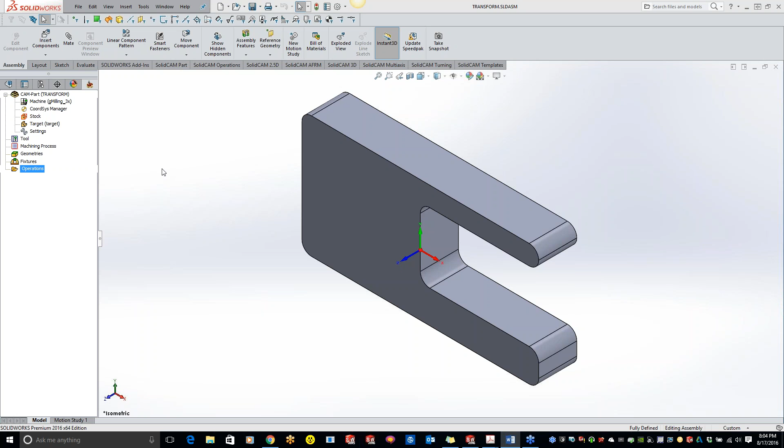We're transforming it using a mirror feature, quite different ways of doing it. So what I'm going to do for our first part is we're just going to program just one simple part right here, and then we're going to transform that part multiple times.

So what we'll do is create some stock, and we'll treat it as if you guys are running this on a router with a vacuum table or something, and you want to make multiple parts out of maybe a 2-foot by 4-foot piece of aluminum.

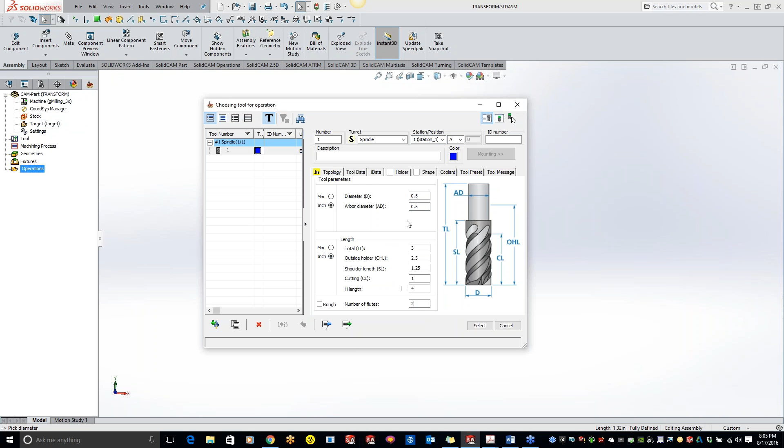First things first, we'll program it like we normally do. We'll come in here, do a profile, grab our geometry, accept that, grab a tool, and use a 1/2-inch cutter. We'll cut aluminum here, let's put a holder on there. And that looks good, so we got our tool and holder.

Do our depths real quick, and let's just do a helical, doing a helix down into the part, going down to 100th thou.

Okay, so now we've got our tool path for just our one part right here. We can play this through, but let's pretend we're cutting this out of a very large piece of stock. So I'm going to add that stock in here. I went through the stock in one of the other night classes, but we'll just add a new part.

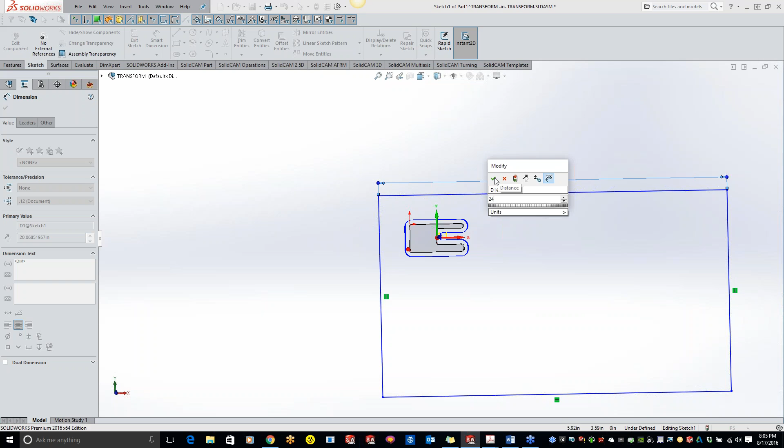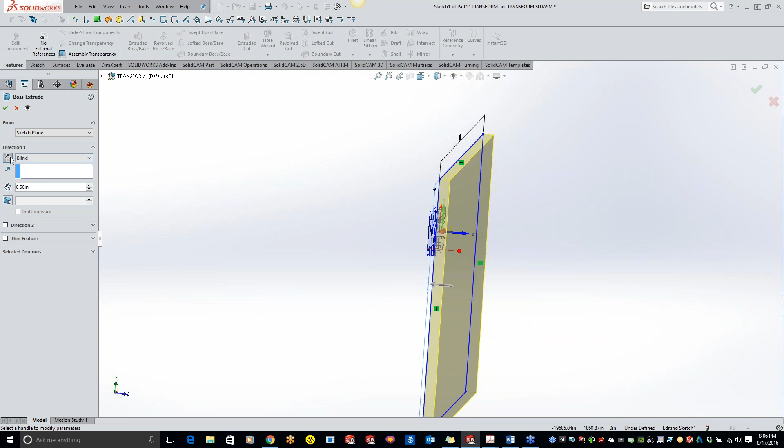Let's see, we'll say this is 24, and we'll do maybe 1 foot, and we'll extrude that out real quick. I just want to make sure I'm going the right way here. Looks like I need to reverse my direction. There we go, hit the green check mark.

Now I'm going to add that to my stock here. This has nothing to do with transformation, I'm just adding in stock for you guys. All right, so we've got our stock here.

Now, let me change the transparency so we can see our part. Instead of taking that part—maybe we want to get 10 different parts out of this big chunk of aluminum—instead of clicking and moving it around to add more parts, we'll just use the transform feature.

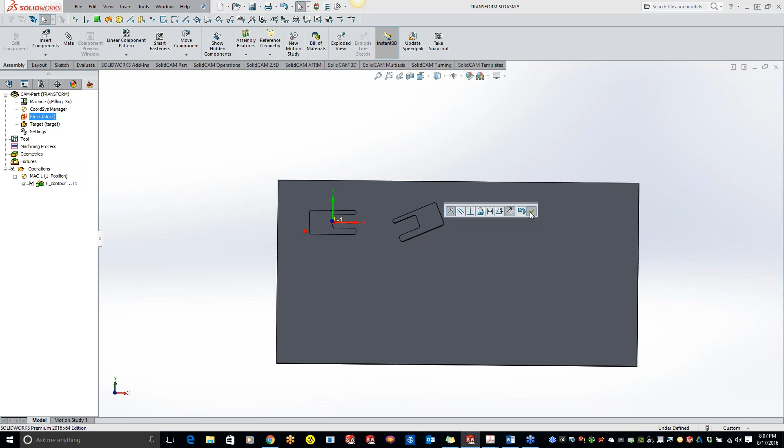Oops, let me accept that. So right-click once you've created your operation and click on Transform. You have all your transforms right here, and I'll go through each different option. But for this one, we're just going to use Translate right now. Now you have the option to do a matrix or a list. I prefer matrix, just so it's a little easier to see.

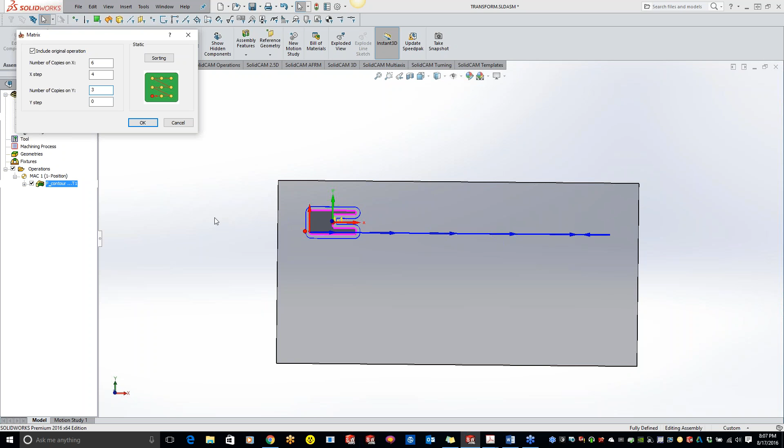I'll show you list—basically you just tell it what you want for an offset in X, Y, and Z, and enter it in there. Or with the matrix, you can tell it how many copies in X and how many in Y. So let's say we want maybe 6 copies, spacing out about 4—let's try 4, and go 3 copies. I'm just kind of shooting from the hip here, guys. Let's see, what's our dimension right here? Let's go 2 inches. And you can put a minus direction, so we'll put it in there.

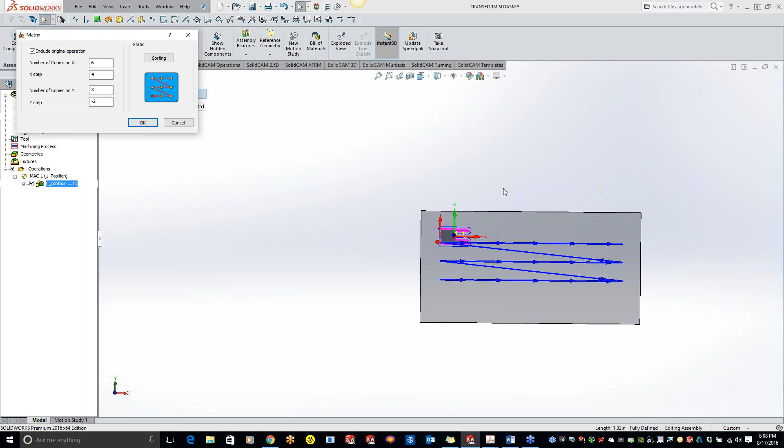So once I hit OK, basically what I told it to do is create 6 copies going in the X direction with a spacing of 4 inches, from part to part. It's not the distance between the parts—it's from a point on one part to the point on the other part is where it will end up.

So hit OK there, and you'll see that we get our parts. Now I can see that I went too much in the X, and I need to increase my spacing in the Y. So let me just edit that real quick here.

And we'll just go 5, and maybe we'll do 3 inches of spacing. Now you'll see that we spaced it out. So basically, the transformation is saving you guys a lot of time on the programming side of things—all I had to really do is program that part one time. But now when I go to simulate this, let's do it in Solid Verify here for you guys.

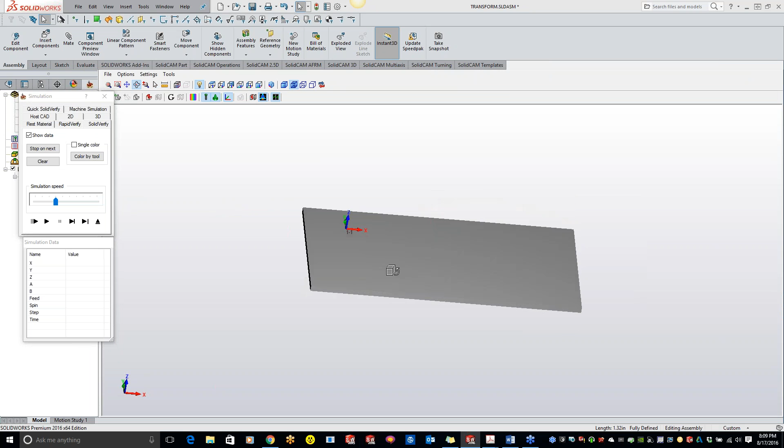You'll see that we have all our parts. It's somewhat like nesting, so you guys can put as many parts as you want on there, but it's not going to automatically figure out the best order or shape. So you guys just have to tell it where you want it, with that spacing. We basically programmed just one part, but now we have all these parts done and finished without having to program that part multiple times, or copy and paste it multiple times. We just have one simple operation right here.

So do we have any questions so far just on doing a simple transform? Let's see, so we are going to...

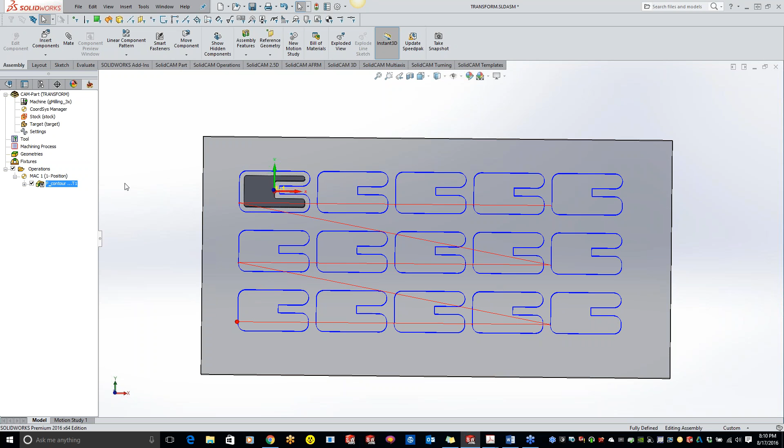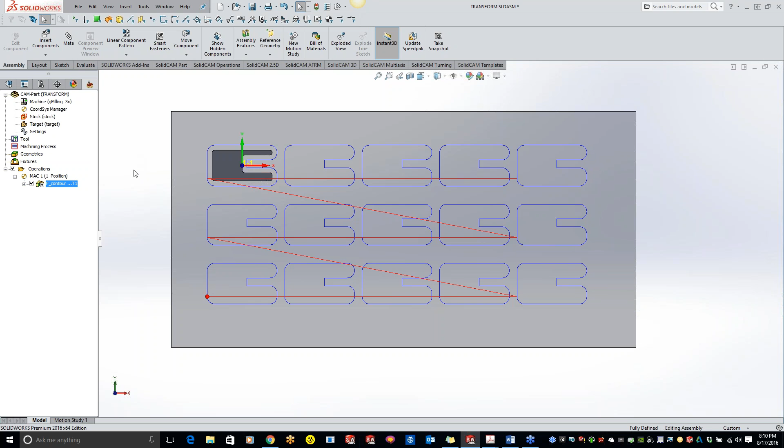Yeah, Jeffrey, we're coming over to your house and we're having a dinner party. Or maybe we should have it at Terry's. Terry should have it at your place. Yeah, sorry, that sounds good. I'll make a pan roast and have everybody come over and have some seafood, if everybody can get through all the fires over in California right now. Yeah, if anyone does want a phenomenal seafood recipe, it's sort of like a very rich man's chowder, send me an email and I'll email you the recipe. It is absolutely unbelievable. Cooking 101 here. Sorry about that, Kevin. No problem.

Okay, so this also works, guys, if you have multiple vises. There's two different options for running multiple vises, let me delete what we've done here, and delete our stock out. So let's pretend we're taking this part, and put another one right here and another one right here. Maybe you have a vise set up, or even bar stock, with different vises. If you know the distance of the vise, you can use this transform feature. So unfortunately I'll have to add another, let's do the operation real quick here.

Kevin, there was a question as well. Dwayne Cole asked, can I resume from the 5th part? Resume from the 5th part. Dwayne, can you give me a little explanation on what you mean by that?

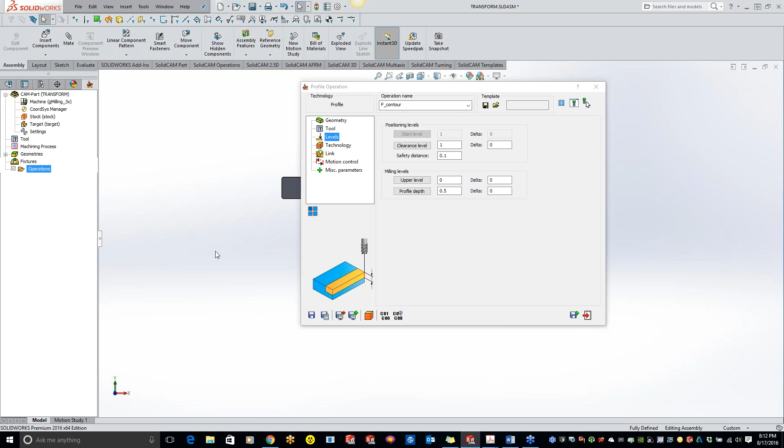If something happens, oh no, there is no way just to start the program at a particular location of the part. So either you have to go through your G-code and start it off at that part, or you can just run through everything. But unfortunately, there is no way to just start it at part number 6 and go from part number 6 on. We could program it so it's just at part 6 that way, but then you'd have to reprogram it. Can you type your question into the question box, because we don't have a way to unmute. Right, Kevin? Yep, go ahead and type your question in there. Like I said at the beginning, we put everybody on mute to eliminate background noise.

Okay, so we got our part there, we got our toolpath, but maybe you know that your vise is exactly 5 inches over, and that part is exactly 5 inches over. You can do the transformation there. Now, one thing I forgot to tell you guys is, instead of coming in here, closing out, and then right-clicking to do a transform, you can actually do it within the operation. Right here is the transform button, so you can just click transform. It'll do a matrix, and we know that we have 2 copies, and each copy is 6 inches away from each other. Hit OK.

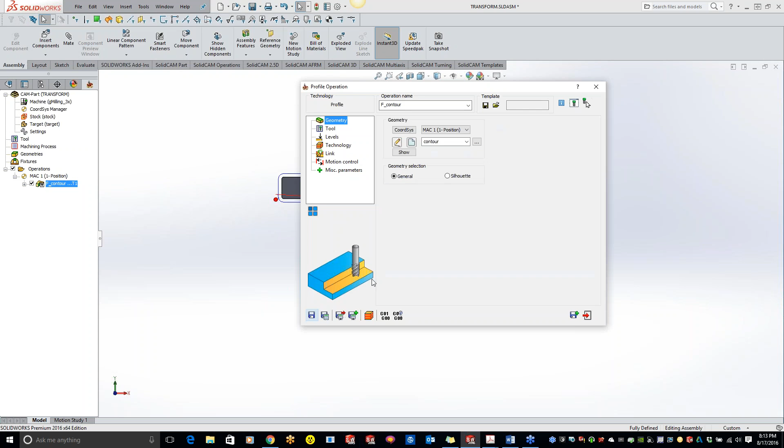And I only got 2 copies. Oops, sorry, let me change that transformation to 3 here. So if you know your exact distance, this is another way of doing it.

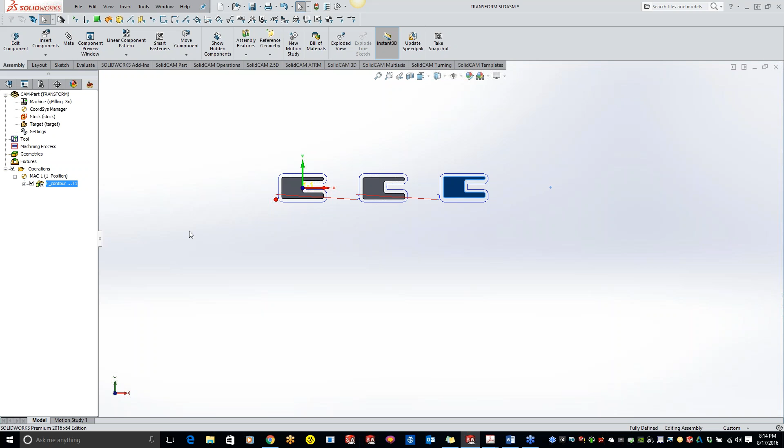For those of you that don't know, if you wanted a separate work offset for each part, right now these are all going to be under G54. But if you wanted a separate work offset for each part, we're getting off the transformation topic right here, but what you can do is double click where it says CAM part, come down to your machine options, and change the number of fixtures. By changing the number of fixtures to 3, it's saying we'll program this part for 3 different fixtures right here, and it will create G-code for 3 different work offsets. So this one will be G54, G55, and G56, but we only had to program the 1 part by itself. So that's another way of doing it.

So if I hit OK here, and let's just do our transform, delete that.

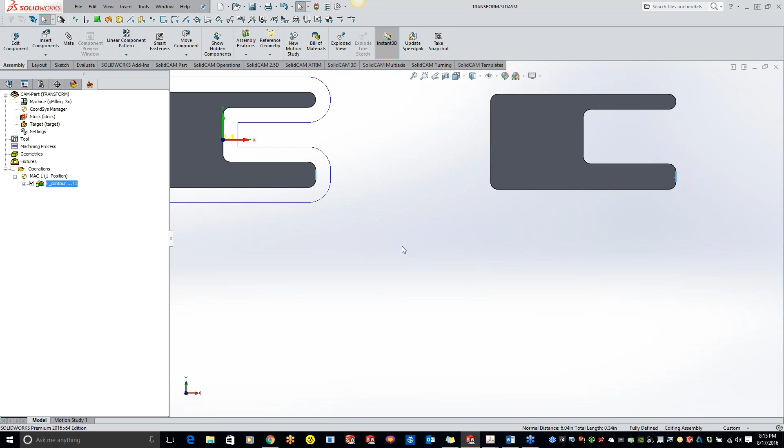What is the reference point between instances? The reference point is the distance between part to part. So it's going to be the reference point from right here to the distance to right here. It's just the distance from the part over, not the distance between the parts. It's just what you want to measure from right there to right here. We get a measurement of 6.04 inches, and that's what you could put in there to be exact. It can be anywhere on the part, as long as it's the same spot. So we can go from the backside here to the backside right there, and that's going to give you your distance also.

Now that we have that fixture offset numbering turned on, we only programmed the one part here. Let me open up the operation and we'll G-code it out. You'll see that we have G54 right here. If I go farther down, we have G55, basically doing the exact same programming. And then farther down is our G56. So if you guys are using multiple fixtures running the same part, this works wonderfully. A couple different ways of doing it for you guys.

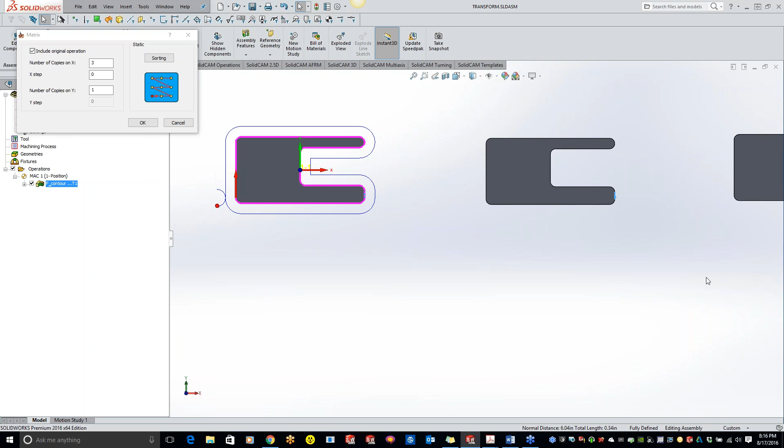He's asking where we can change that distance. So what we'll do is another transform, do a matrix, and do our 3 copies. Here is your distance that you're changing. So we measured, what was it, from there to right here, 6.04. So we can put 6.04 in there. Hit OK, hit OK. And you'll see that we got our distance matched up just perfect there. That's how you can change the distance between the two.

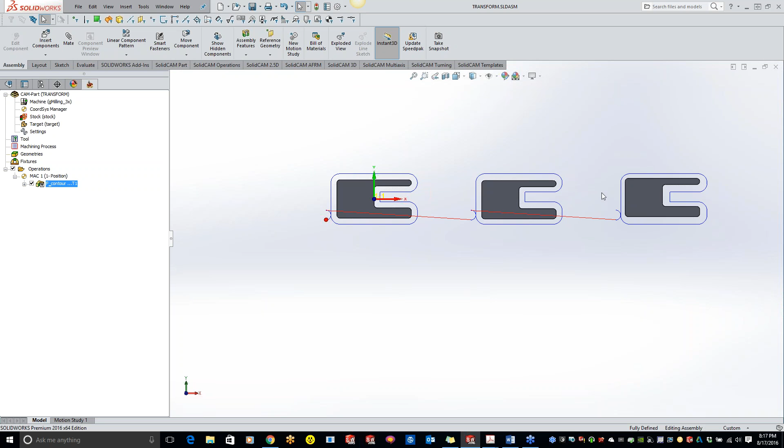Let's get into a little bit more complex parts here. Open up one of my other projects that we're working on, and we'll work on the translate and the rotate feature. This part has the same pattern going in the X, but it's also rotated up every 90 degrees. So we'll start off with doing a basic profile here again, and we'll just program just the one slot, and we'll do the auto constant Z.

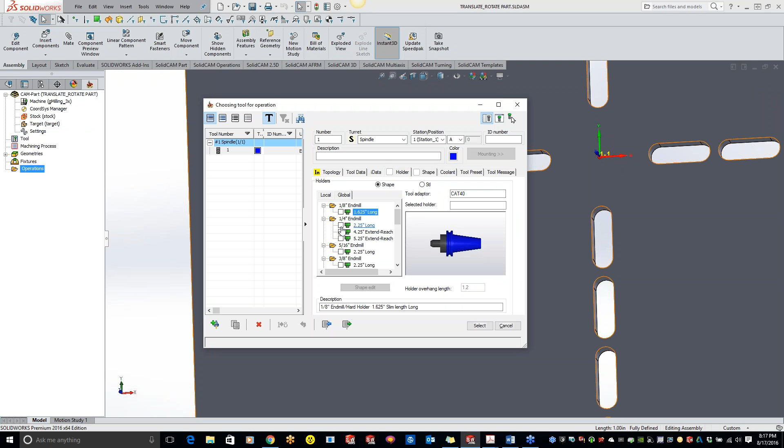We'll do a nice helical entry going with a 1/4 inch tool, just 100 thou. I'm just going to turn my lead in and lead out to none. So we have our part there, and we just programmed just the one by itself.

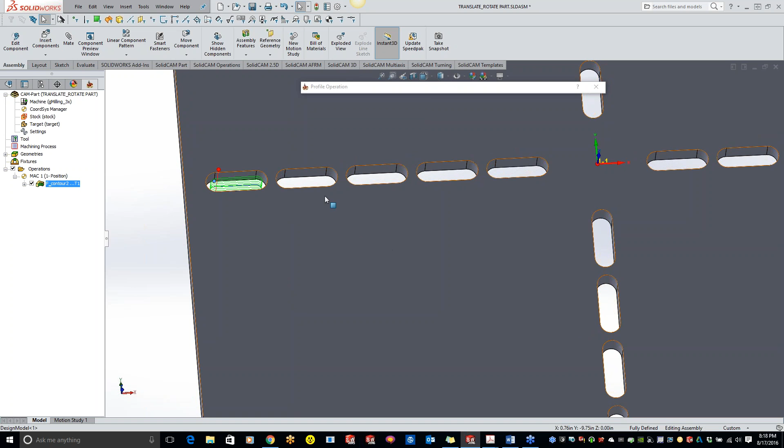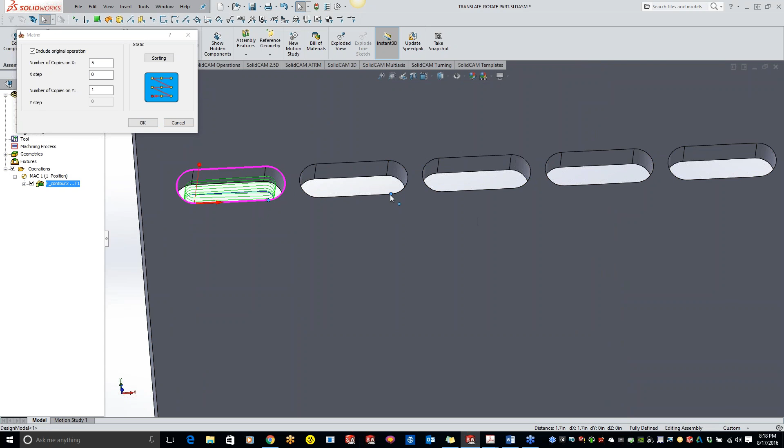So what we want to do now is obviously copy that over. We'll bring it back up, click the transform, and do the translate. Do a matrix again, and we have 1, 2, 3, 4, 5, so we'll do 5 copies, and our distance is going to be from here to here, which is 1.7. Hit OK.

So now we did the transform, we have our slots going in the X direction. Now what we want to do is rotate it up. So go back to our transform, and you can add as many transformations as you want here. You don't have to feel that you have to stuff it all in one, just keep adding to the list. So now what we're going to do is a rotate.

We have the same different options, you can do a delta or a list. I kind of prefer the list. What we'll do is include the original. Our angle value is going to be every 90 degrees, and I have 3 different angles in there, so I'll just add 3 and hit add. Now you'll see it does it for 0, 90, 180, and 270. So we can hit OK.

And now you'll see that it did all of our parts. So what we did is we did a translating it all the way over, and then we did the rotate feature, which is rotating it around.

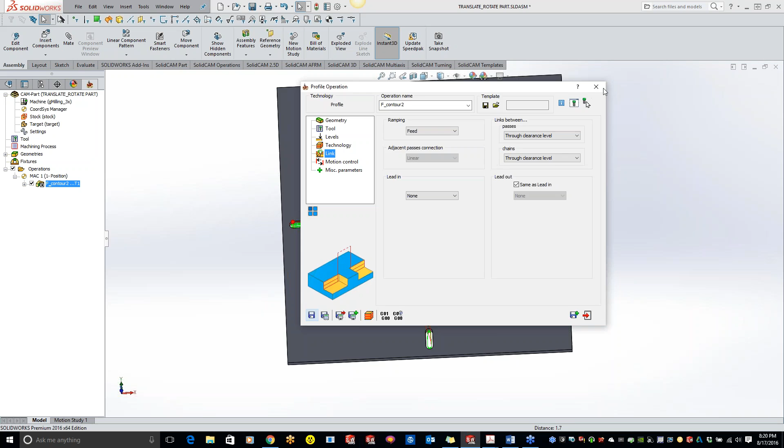Now, if you guys want to add more of those in there, all you have to do is increase your number right here, and we can keep adding more. So like I said, we basically just programmed the one slot, and then we transformed everything from there. There's really no need for you guys, if you have something similar, to program that multiple different times and have multiple different operations. We can do this all in one operation, but you'd have to go through and chain each one of these, or we could just use the transform function in there.

All right, so let's take another look in here. So what you guys can do also is, let me just cancel and clear everything in here. So we're starting off fresh, and now we have no more transformation in there.

Now what you guys can do is, instead of editing the current operation, you can add a new operation. You can add it at the current position in the operation tree, or you can add it at the end of the tree. So if you want, we can just say add a new operation, and then we'll do the translate in the matrix.

And what did I say? 1, 2, 3, 4, 5. We did 5 at 1.7. Hit OK, and we did the rotate list.

Actually, we won't include the original that time because we already did the original. So now what we'll do is just do an angle value of 90, 3 times, add, and now you'll see it adds a separate operation with just the transform down here.

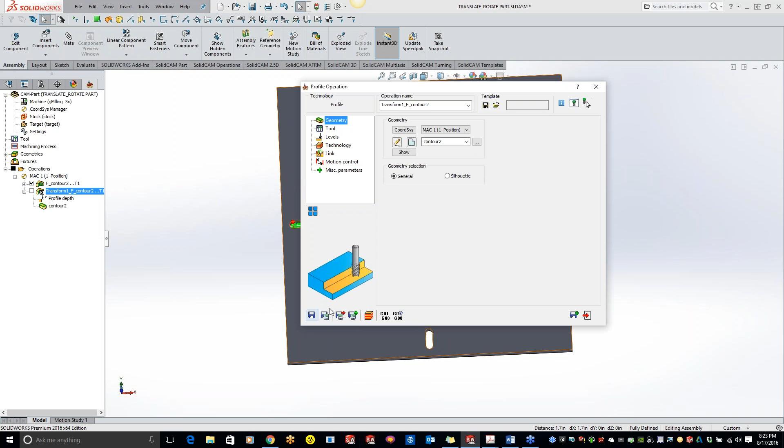There we go. So now you'll see it kept our original down here of just having the one, and then it started a completely new operation with the transform in there. So hopefully that makes it pretty clear for you guys on what you want there.

Also inside there, you guys can suppress the original too. So just some more features in there. And you can do the synchronization, basically just update everything. So do we have any questions?

The include original option is a little vague as well. Okay, so let me see if I can find a good way to explain this. Let me start over here.

Okay, so when we do a transform right now, if we do a translate in the matrix, if I just do number of copies as 5 and not include the original, and we did 1.7, it's going to leave out that original one that we pulled in there. So by leaving that one out, it kind of suppresses the original and then does the other transforms in there. That's basically what happens when you leave out the original model.

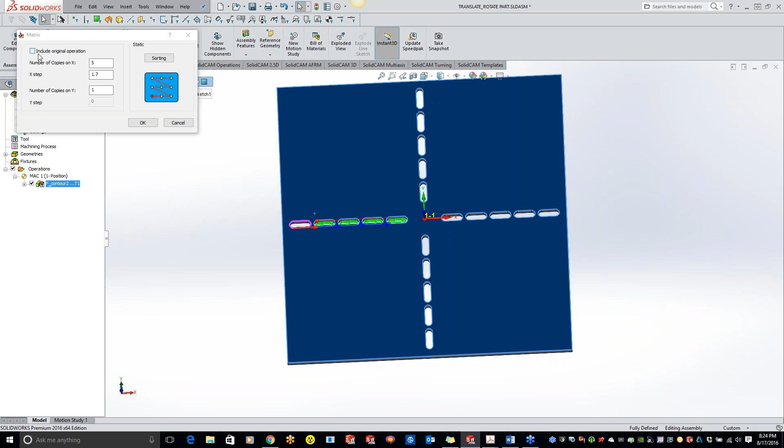Does that kind of answer your question, Dwayne? Okay, perfect. Yep, all right.

Any other questions that we have going on with the translate or the rotate functionality in there? Number of copies on Y, also when I use that. Okay, number of copies on Y is basically going to be the same thing. So if we had that,

let's just get back in here. We'll include the original. Number of copies on Y is in the Y direction. So right now we just have that going in the X direction, but if we want, we can create that many copies in Y too. So maybe you want to do a second set, but you just didn't have the CAD updated for it. Let me just get a quick number here.

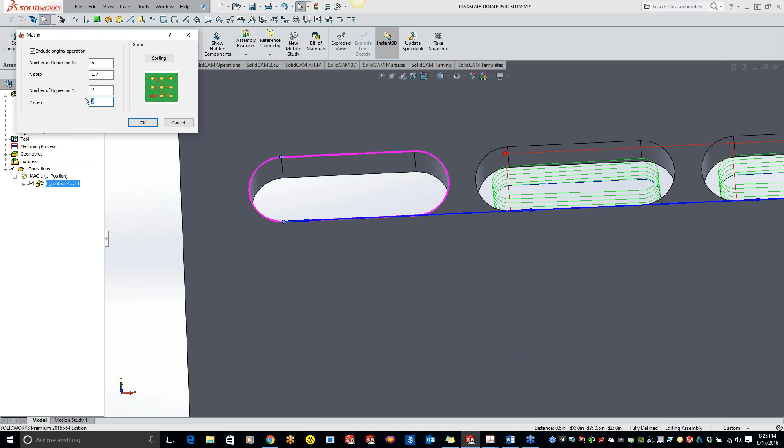Let's see, the distance of that slot is 1/2 inch, so let's just go 1 inch. Hit OK. So the number of copies in Y is basically going to just copy it up in Y. Let's see, I'm falling behind here. Copies in Y. Yeah, the other one is after making Y equal 12 inches.

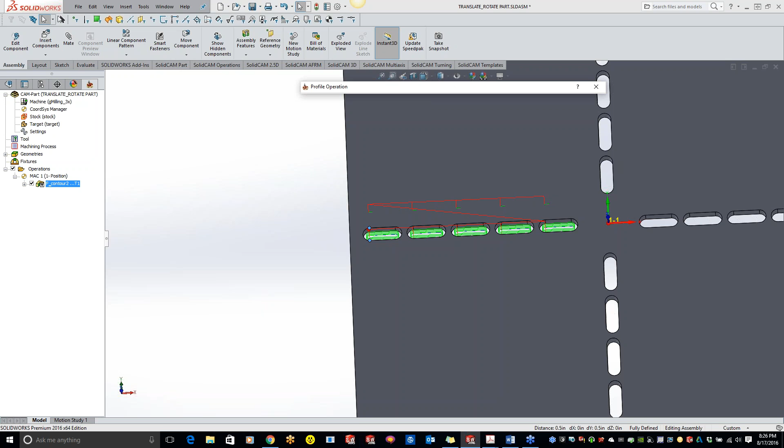Terry, you know what he's saying there? Yeah, he's saying he's in the Y. Let's see, when he goes in the Y direction, it always goes back to 1, is he saying? After making Y 12 inches in order to meet it.

It looks like he's got to change it to 2 and go back to 1. Okay, you shouldn't have to change anything. If you guys don't want to do any copies in the Y direction, just put it at 1, and you'll see it actually grays out the Y step. And you guys can put 24 copies in here, and it's going to space it out 1 inch apart. So we can kind of cover up the screen a little bit. Oh, I could even do 11.

There's another, say, I want 1 Y at 12 inches. So he wants 1 Y. And I think the answer why it's grayed out is because he's not going in the Y direction, so it grays you out, you don't have an option. Yeah, so no, the number of copies. So this one is counting 1.

Now, if you want another set of these at 12 inches above, which I think you're getting at now, what you want to do is you need to do a copy of 2, and then you can put your 12 inches there. So it's how many copies do you want? So we have the copies down here, and then we have the copies up here. So you have 2 copies.

The reason you guys can't change the Y step when it's at 1 is just because it's the original, and there's nothing to put its spacing in there. It's just keeping the original there. So yeah, you can't go Y 12 inches from Y when there's no copy. So there is no copy. Yep, put that at 2, and then you can put your 12 inches in there. So hopefully that answers your question, Dwayne.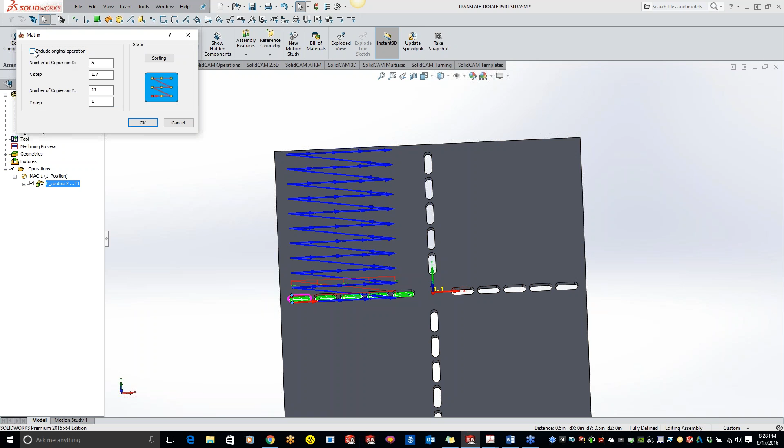And that's what he asked. Must I have it checked if it's unchecked? If it's unchecked, then it's just not going to machine that original one down here. But Dwayne, if you want, we can get into this more too offline, so we can answer questions. I think I have it answered, but if not, definitely let me know.

So now what I've done is kind of like what Dwayne was getting at, well this is a little bit past it, but we're doing 11 copies and only 1 inch gapping, and you'll see it's doing a zigzag pattern. But maybe you want to change the pattern, so you guys can come over here and change the sorting to something like that.

So it's going to kind of go up, down, doing a zigzag that way. You guys can change the sorting pattern however you want to best utilize the toolpath and get the fastest cycle time, so you're not wasting time going back and forth with a zigzag pattern like this one. So we're starting right here, and instead of going all the way back over to the left side, we can just go up and do that way too. So that pattern is going to basically be this one right here.

So now we're kind of utilizing our toolpath movement, starting at the left, going to the right, go up, and then go back to the left side, go up, go back to the right side, working that way. So Dwayne had another question. The biggest deal for me was the climb and conventional. Probably can't change that, but it would be a great feature.

Actually, it does change, and I'll go over that with the mirror, because mirroring is basically taking that part and flipping it over. So the toolpath will actually be flipped over too, and technically would be conventional cutting versus climb cutting, but it does adapt for it.

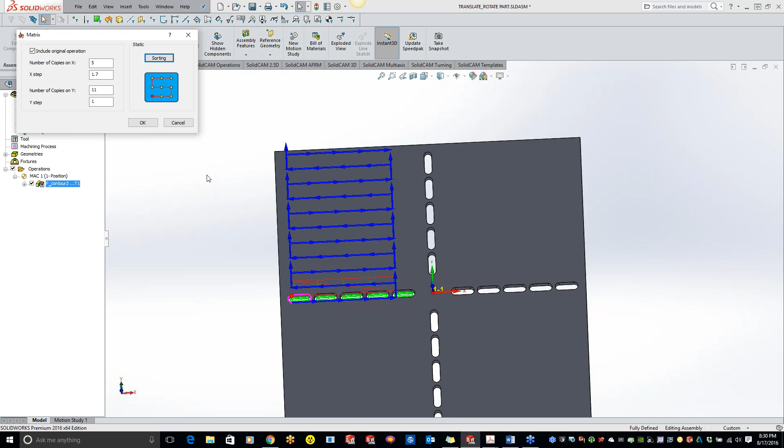For those of you guys that use the transform with the mirror feature in iMachining, it was only going the one way, so when you do the mirror, it would actually conventional cut. They added that in with 2016, so if you guys are looking for 2016, please let me know, just shoot me an email, and we'll get you guys set up with 2016.

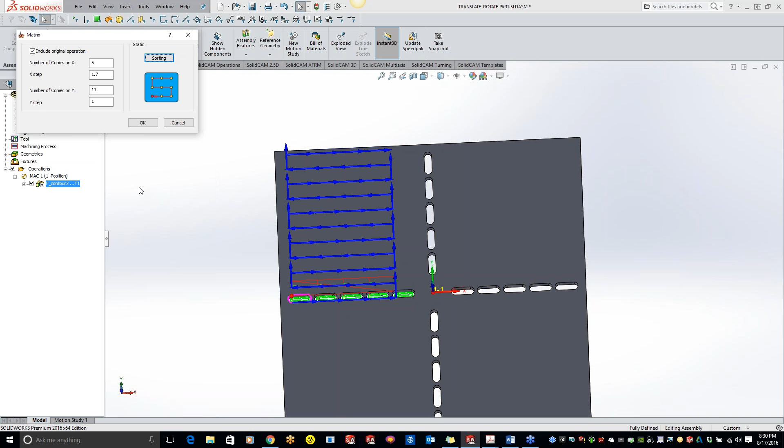We're just kind of doing a soft release right now, running on Service Pack 1, and it's been very good for us. So let's get rid of this part here and get into the mirroring. Or did we have any more questions on just that part by itself? I think we're set. Okay, perfect. So let's go to the mirror here.

Okay, pretty simple, easy part here. Basically we have a kidney shape over here, and it's an exact mirror of what we have over here. I'm doing some simple shapes right now because I know a lot of you guys have big parts, but I can't use those to show the whole world what we're doing.

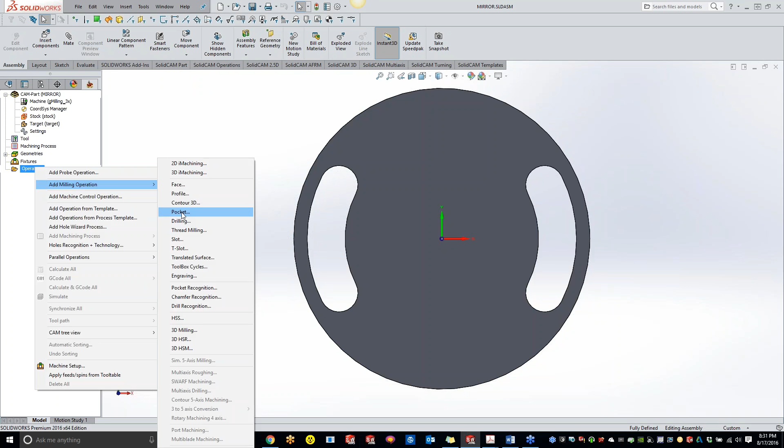So we just got a pretty simple part here. Let's go ahead and do a pocket operation here. We'll grab that cutter right there, set our level here, and take it to one full depth of cut. Save and calculate. Okay.

Okay, whose question do we got here? When dealing with multiple vices, can we mention which one to do first and which one to do second, sorting like a path? Yes, that's right in that sorting functionality I just showed. If you want to start from the left to go to the right, or go from right to left, it's right in that sorting tab in the transform feature. So to answer that question, yes, you can.

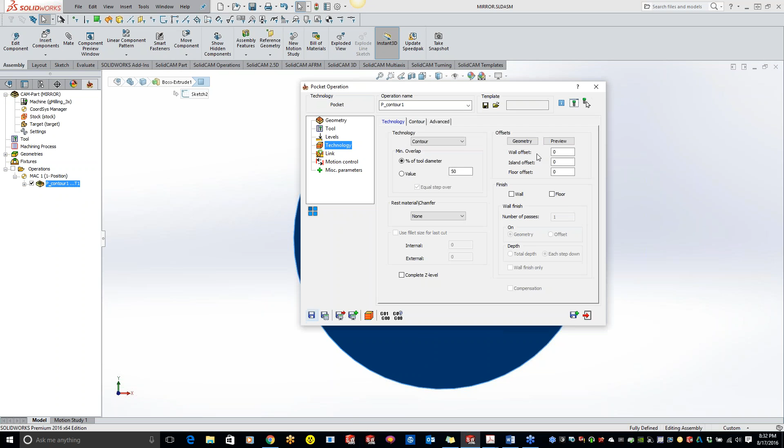Okay, so just program the one side by itself. Let's do a simulate here. Oops, I got my 3D mouse set up a little fast. Okay, so we got our shape cut out there.

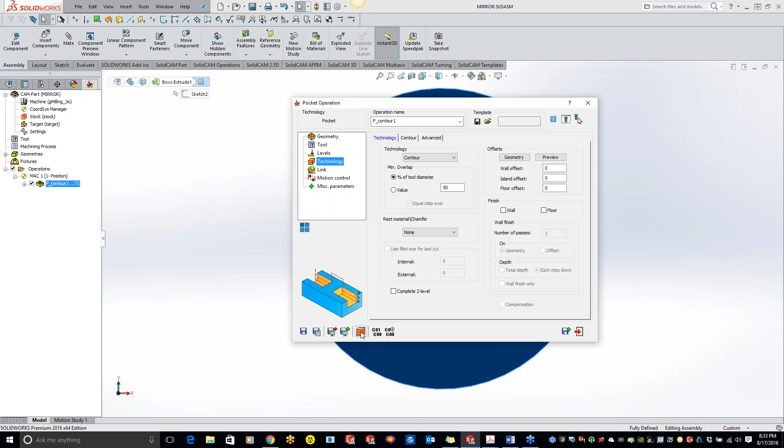So now instead of making a copy or adding more geometry, we can also do the transform feature, but now we'll do a mirror. I want to mirror it over my X and Y. You guys can pick your mirror point. So what I'm going to do is grab the center of the part, do a pick, center of part, and hit OK.

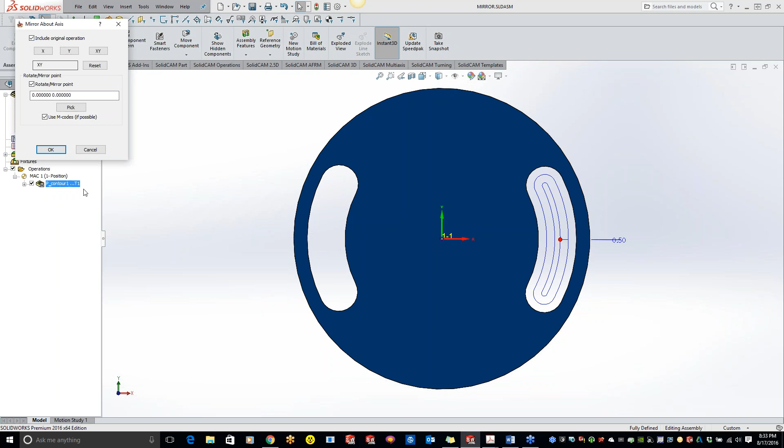Save and calculate. And you'll see that I forgot to include my original. So let me get back into my transform here and include that original.

Okay, so now we basically just copy that over. Now, I forgot to mention, if you're unsure what was transformed and what's not, there'll always be a little logo at the bottom of your contour profile operation. So right now we're doing the mirror, so the little M is in there. If we're doing a transform, the little T will be in there. Fourth axis, which we'll get to next, will show different icons for everything there.

So now let's do a simulate and show you guys that it will still be climb cutting. And see, we're still climb cutting. So everything works great with that.

Like I said, all you guys have to do is mirror it around. Pick the point you want to mirror about and mirror it over that way. From there, if you wanted, you can add a translate in there, maybe if you want to make a copy of that, making it a little bit closer in or whatnot, the sky's the limit. I'm just trying to show you guys on a simple part here, and then you can apply it on your end.

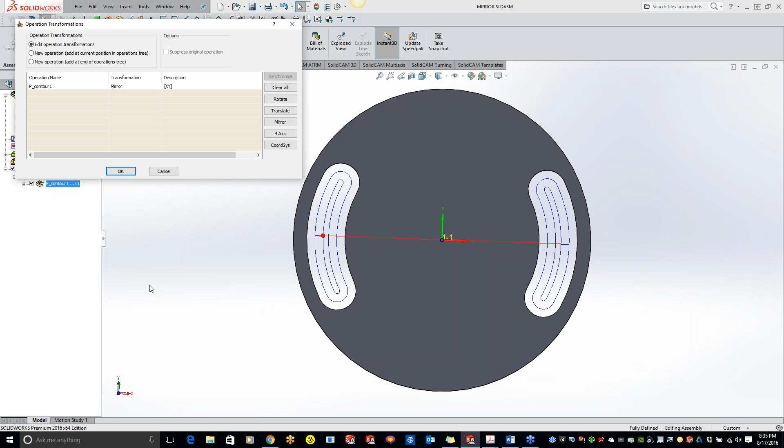Okay, so any questions on the mirroring so far? Looks like we're good, I don't see any there. Yeah, I think we're good, Kevin. I don't see any. All right, perfect.

So now let's get into fourth axis. So let's go to... there's a question: can we mention any plane?

Not sure what you mean by any plane. To mirror? Well, let's just bring that part back up here. Like a plane to mirror about, or like in SolidWorks? Like in SolidWorks. Yeah, so what we're doing here is pretty close to what we're doing in SolidWorks.

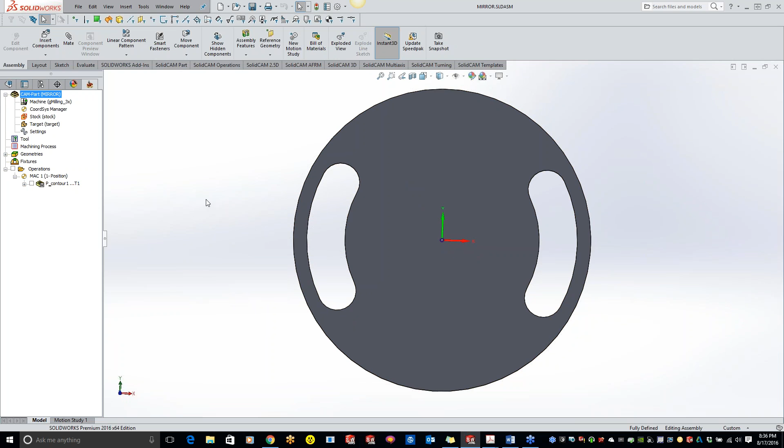In SolidWorks, you have to pick if you want to mirror about the x-axis or y-axis, and that's right here. But right here, you can see I did the x and y, but if you just want to mirror about the x-axis or just the y-axis, this is where you're choosing which plane you're mirroring about. And then, like I said, the center point of where you want it to mirror about.

All right, so let's get into fourth axis here.

And fourth axis. I already set up this part with some stock so we didn't have to waste time bringing that stock in here. Basically what we're going to do is have this part in a fourth axis indexer and just do some engraving and machining off.

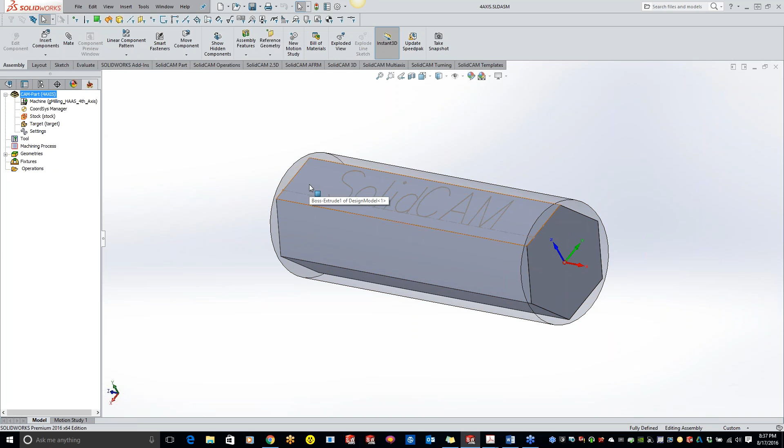So what we're doing, couple questions Kevin. All right, tell me what we got. Yeah, the first question was, this was for 3-axis, what you were showing them, right?

Yep. And then 5-axis will include XZ, YZ, etc. Correct, Dwayne. Yep. So that's going to be if you add a 5-axis operation and then do a transform off of that, it'll add that all in there.

And James had a question about the circular pattern on a transformation with numerous holes at a certain diameter. James, can you give me a little more information on what you mean by that one?

A circular pattern, the transformation. Not sure, it shouldn't matter. It shouldn't. Is he asking about different size holes? It shouldn't matter what it's mirroring. It's mirroring. Yeah, right Kevin?

Yeah, I think he's talking translates right here, but let me open up that part here. And let's do a transform. Oh no, let's just close that one.

So James, can you give us just a little bit more explanation of what you're saying there?

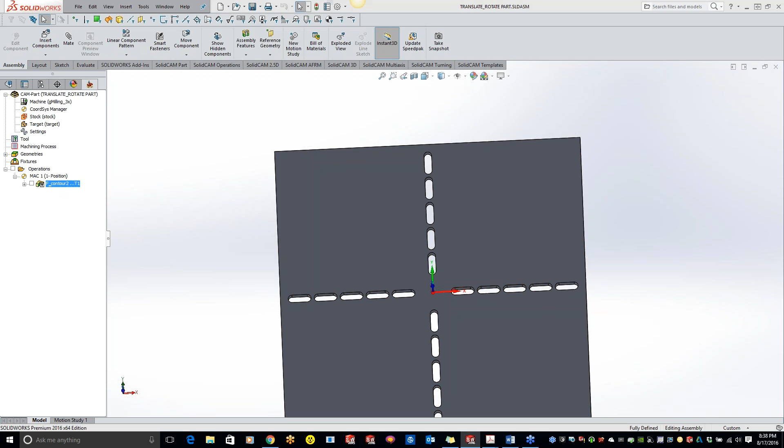If we want to do more circles in here, what we can do is do a transform. And I forgot where we even left off with this transform. I've got to see this.

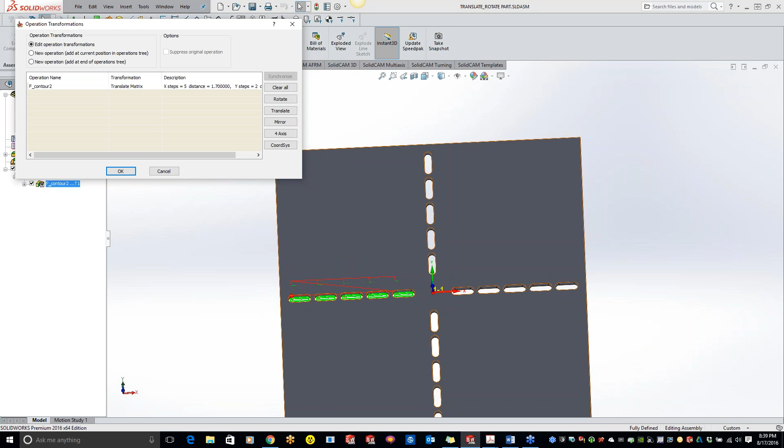Okay, so James had some more. He says, where you program one hole and then go to a circular pattern of holes. Okay, yeah, so we'll pretend these are our circular drill holes right here. So let me just edit this one here, and we'll just get rid of, put that back at 1. Hit OK. Now we'll do the rotate feature, and we'll do a list.

Let's say we want that circular pattern every 5 degrees. And let's just add a bunch of these, include the original. It's going to take a second to calculate because what it's doing is building all that toolpath behind the scenes for you guys.

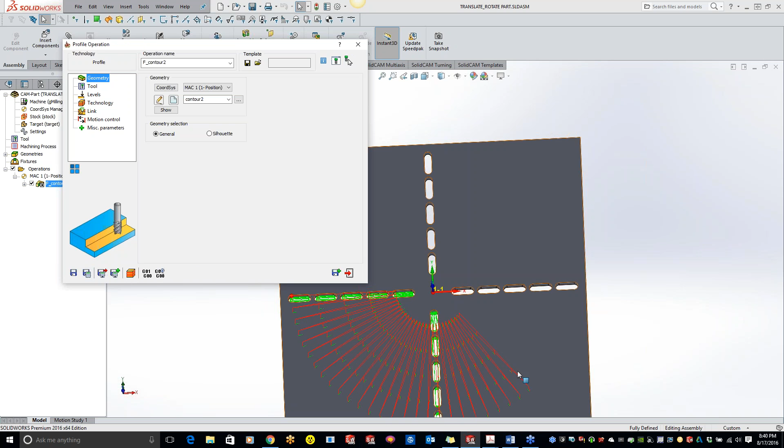So here's the pattern. If you are doing, like I said, it doesn't matter if it's a slot or drill holes, you'll see that we're doing our pattern all the way around in that circular pattern there. So it's basing, when we're doing the rotation here, it off the center point of our coordinate system right there, doing a circular pattern all the way around.

So hopefully that kind of answers it. Hey, James said that's it. Thanks James, okay perfect, thanks James.

Yeah, okay, so let's grab here. Oops, not do a save as. Yeah, if you guys have questions, definitely tell me, because this is totally for you guys, so we have no problem. The more questions we can throw at Terry, the better, because he's kind of an old fart and he gets all flustered when he gets all kinds of questions coming in there. Oh my God, see how Kevin picks on me all the time.

Okay, so we'll do fourth axis here. All right, so I already got my stock set up. We're just doing circular stock right here.

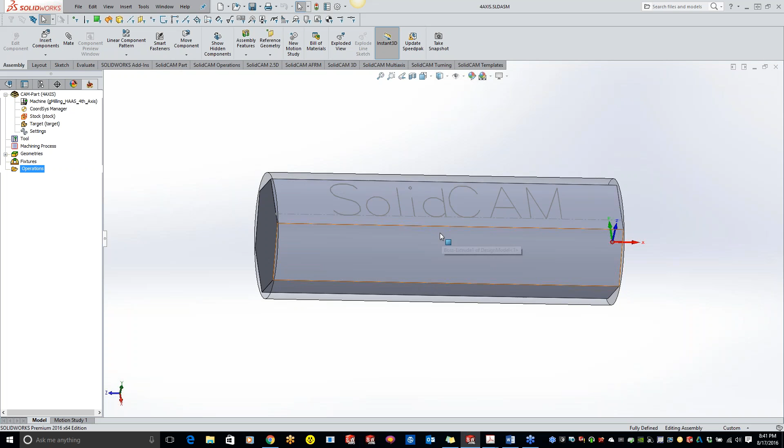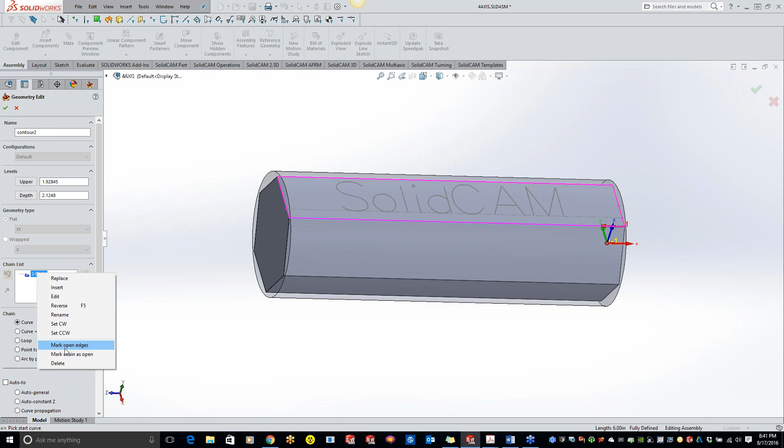Basically what we want to do is mill flats all the way around, and we want to engrave our SolidCAM all the way around. So we'll just start an operation, use a 2D iMachining for this one. Grab our geometry here, and let's do an auto constant Z. Mark that chain as open. And my upper level is somewhere around there, and our depth is right there.

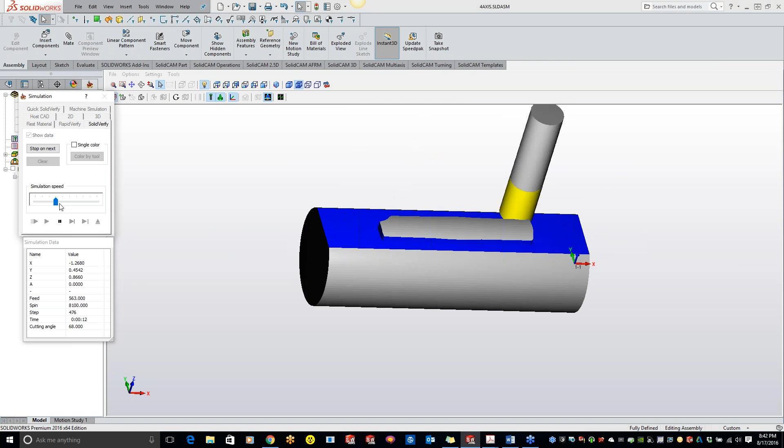Okay, so then we'll grab a tool. And we've got a level set technology. Let's go turbo, I like that turbo. Save and calculate. Okay, so now let's just do a simulation here, solid verify. And speed her up just a little bit more. Okay, so now we got that one part done.

Let's do our engraving now. We'll do an ad milling. With engraving, we're kind of getting a little off topic here, but I'm going to show you guys two different ways of doing engraving. For you guys who want, you can do a profile, and this is kind of how I was taught, because back in 2007 we didn't have engraving, so we just did it on a profile.

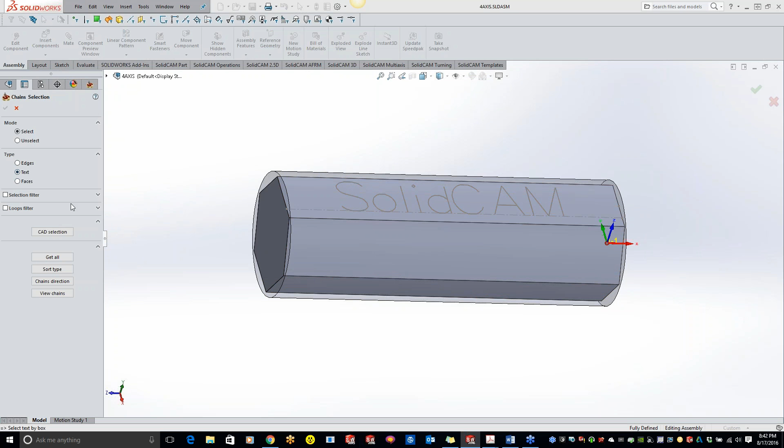So what you guys can do is use profile and come in here. Now when you go to pick your geometry, don't try to chain your little letters. Come over to your multi-chain, click add, and click on text. So now it's going to pick up all my text features. If I highlight my mouse over, you'll see where the icon goes to an A, the little letter shape A, as I'm pointing at my screen trying to show you guys.

There's a little A icon right there. Go ahead and click, and that's going to grab all your geometry right there. Hit the green check mark, and it's going to pull up all those chains for you guys.

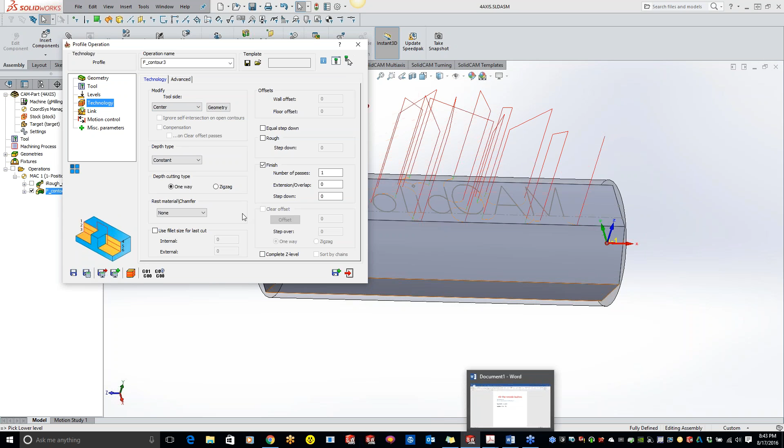Set it up how you normally would. I'm just using a simple spot drill right here. My upper level, I just want it right at the top, and I just want to go down 5 thou deep. I can go to my technology and do center, and that's going to get us the geometry we're looking for. Now, instead of using that, let's delete here and show you guys the other way of doing it.

You can come to engraving, and this one you get a little bit more options. You get a 2D engraving or 3D. With the 3D engraving, you guys just have to have a flat text. It doesn't have to be projected onto the surface. SolidCAM takes care of that for you.

So if you guys have just a 3D surface by itself, and you want to project that sketch on there, you can click on 3D and select the geometry that you want, and then the surface you want to project it on. But this one we're just doing 2D, and basically the same thing.

Come down here, grab your multi-chain, grab our text, hit the green check mark. Same thing with our tool. Levels will be the same here. Upper level is going to be right there, and let's just go down 5 thou.

Technology, center. But now in here, you guys have the option to, if you're using a bold font, fill the area using a contour or a hatch. If you're doing bold, you can just do a middle line only. But since we're doing a single line font in here, we don't really need to worry about any of that.

For those of you guys that do engraving, the best font out there is the DPS Schrift. It's just a single line font, a very clean looking font. There are so many different fonts that SolidWorks has to offer, but if you're just doing part numbers and whatnot, use that DPS Schrift and it'll look the best for you guys.

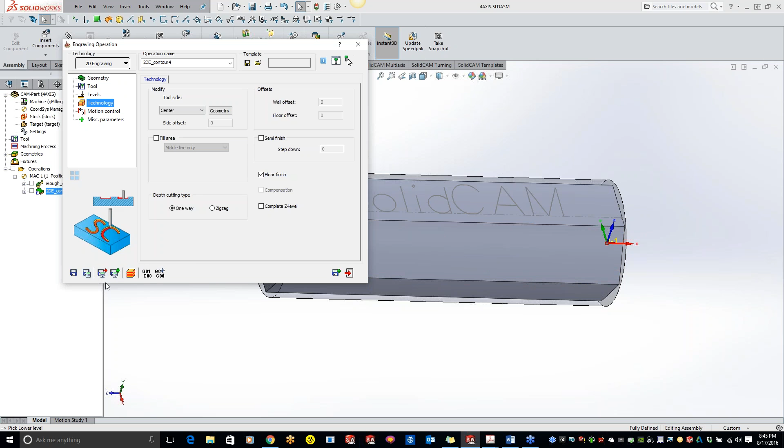So we'll save and calculate that, and we have our engraving there. Now what we want to do is transform that around. I never tried this here, so now I'm highlighting both ones I want to transform.

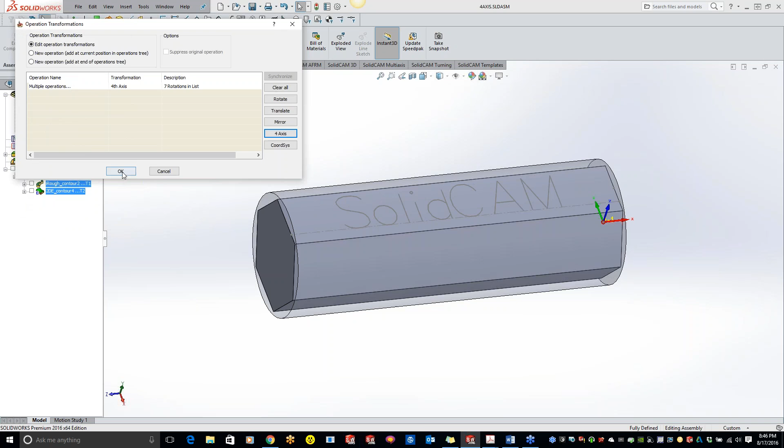I'm just going to do 4th axis, and where are my angles here? I think we did 30 degrees, so I want to include original. My angle is going to be 30 degrees, and I have 1, 2, 3, 4, 5, 6 steps there. And I'm off on my angles here.

Transform, edit. Yeah, it must have been 60 degrees. I can just come in here and delete it, but let's start over here. Angle 60, and 1, 2, 3, 4, 5, 6 steps.

There we go. So now, when we do a simulate, solid verify, we're going to machine that one side, pick up, rotate, it's going to go to the next side, and basically it's just making copies going around your 4th axis.

You guys don't have to create all these different positions in there with your coordinate system. You can just machine it, program it one time, and then just use the transform feature in there.

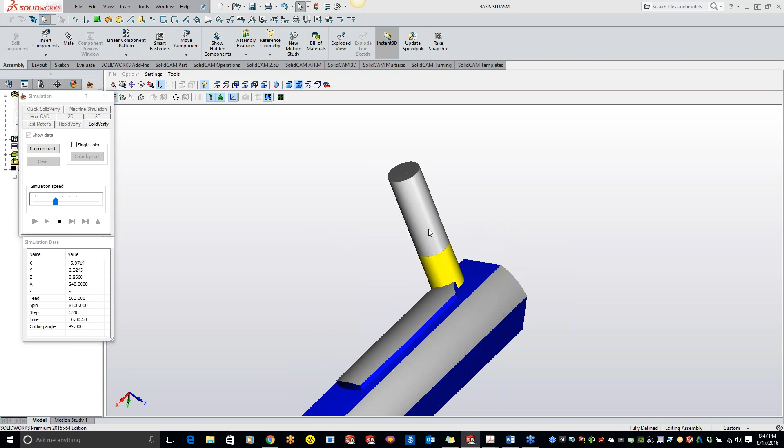Yeah, so if you wanted to do that, let's finish playing this through here. So we'll see we got our SolidCAM, trying to keep up with the rotations here. So now we have our SolidCAM rotated all the way around, we have all our flats go all the way around.

So if you guys want to specify the rotations that you are going, what we can do is let's delete this. We'll do 4 axis, include the original. Maybe our first one, we want it to be at 120. We can do insert, and maybe the next one, we want to do minus 60. See if we can do it minus 60. Yep, so we can insert it, and you can do it in that order.

Like face, engrave, face... oh no, there's no way to specify. What Dwayne's asking is if we can do each time a 4th axis operation, so it just does the facing, then does the engraving, moves over to the next side, facing, engraving. Sorry Dwayne, yes, we can do that.

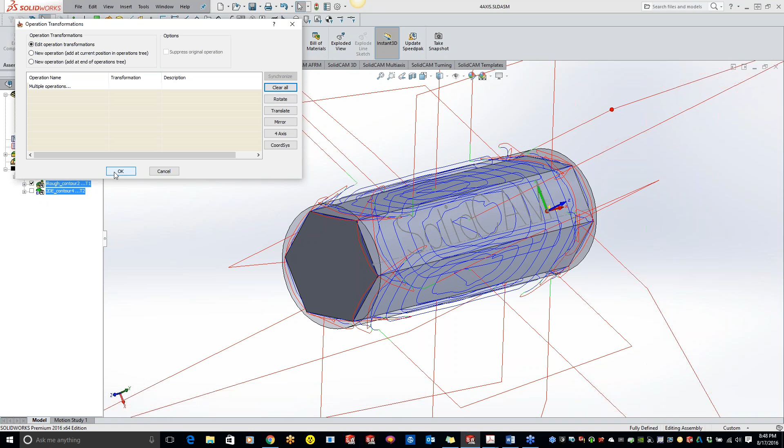Let me clear everything here. What we want to do is the face engraving, do the transform, we'll do the mirror — oh, I got ahead of myself. New operation, mirror, 4th axis, and we'll do angle of 60, insert.

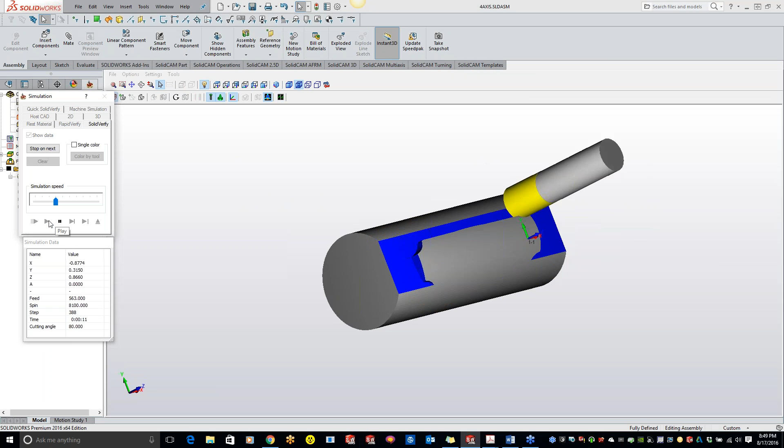Didn't do — oh sorry, okay. So Dwayne, when you included the original, you said it didn't do it. Yeah, you don't want to include the original. So right now we're machining off the flat, and oh yeah, you're right.

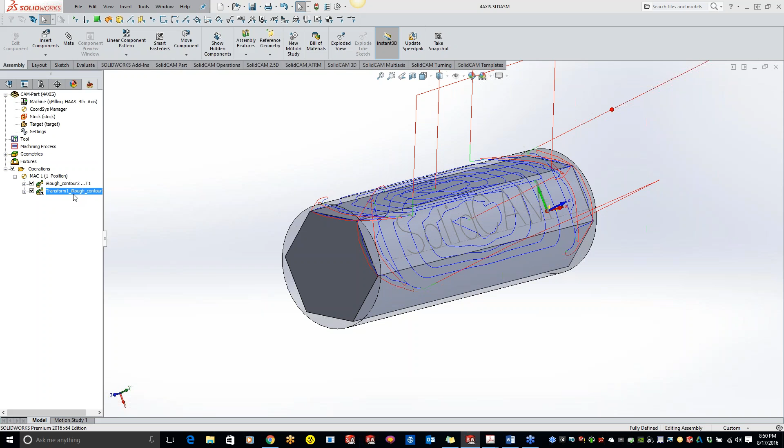Let me get back in there. Oh, hang on, I messed this up. I don't have a transform in the right spot here. Let's just do clear all. Delete that. Do clear all, okay.

And Ronnie said he was just clarifying what Dwayne was saying. Oh, gotcha. For some reason, I'm not... transform, and delete. Dwayne said he has a problem with clear all. Yeah, my clear all is not working either.

Uh-oh, we got a stumper here. Oh, because it's a different operation. Okay, let's start over here. Found out what I did wrong here. So we get back our engraving here.

Come on... there we go, grab our tool here. Levels, upper level, and here. 0, 5, and do center, save and calculate. Okay, so now we have engraving, we have our iMachining.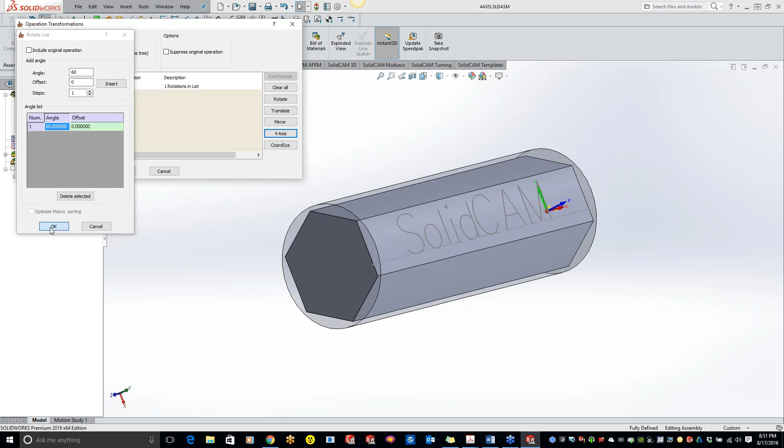So now highlight those, do a transform. We'll do a new operation — actually we'll do it at the end of the tree here. 4 Axis, and we'll just do angle of 60, insert, hit OK. So now if we do a simulate, it should go in the exact order that you're looking for, Dwayne.

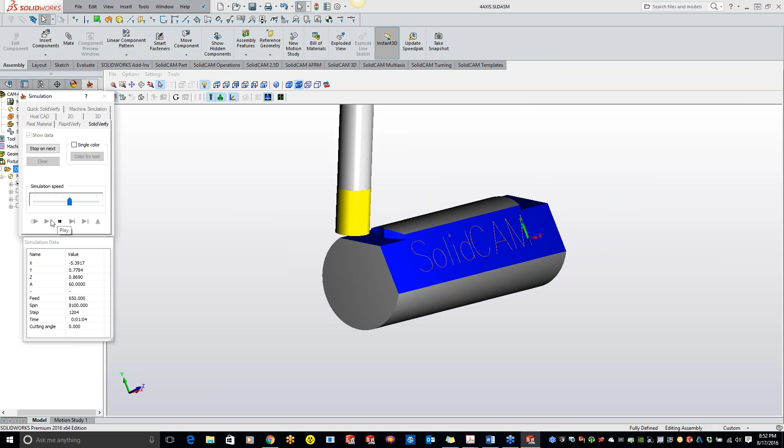Let's just test it real quick. So we're doing iMachining here, and now we're doing engraving. Switches back over to iMachining, and back to engraving. So is that what you're looking for, Dwayne?

Swing — perfect. Do we have any other questions with the 4-axis? Or is there anything that I missed, or that we missed in the questions that anybody has? Okay, I think we're good.

So let's get to the tombstone here. Whew, I started sweating on that one a little bit.

Dwayne, you almost had me going there. You don't sweat in Minnesota. Yeah, cold — just think it's going to be snowing here real shortly too. And Dwayne's not done either, so you're going to be really sweating.

Okay, the part that I'm pulling up, Carlos up in there. Hey, Carlos.

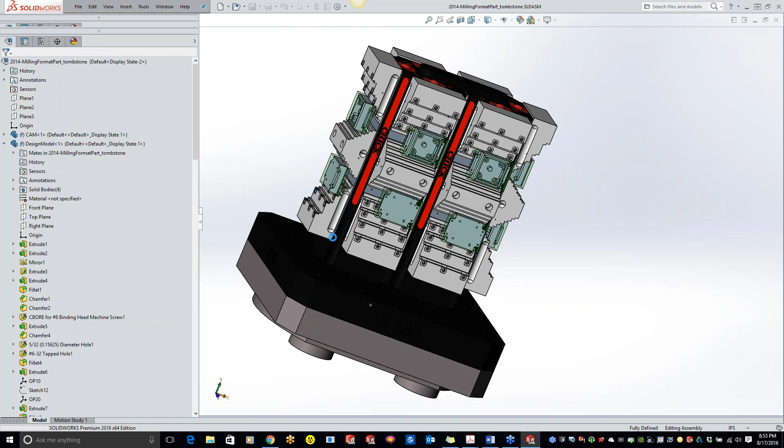Yeah, the part that I'm pulling up here is a real complex tombstone. I kind of went through this last week with the stump the chump, or stump the professor, or whatever you guys wanted to call it. You guys just tell me what you wanted to see.

But so right here is a part, and basically what we're going to be doing is transforming it around a 4th axis. So what I did is I brought in all my fixtures, all my vices, everything that I needed. I programmed just one part, and that's this part right here. Just did one part, just left it at that.

Then what I did is I came through, and with all my different vices here, I brought in and programmed these 2 parts because we have an upper and lower, and this is basically kind of set up for production. The part gets machined on top, we flip it down to the bottom in the chick vise and hit cycle start and go to town. So what we're doing is we have multiple chick vices going on here.

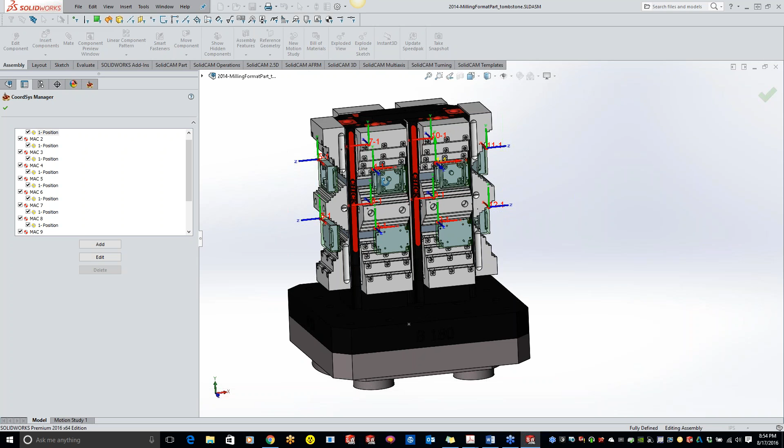So what I did is just open up my CoordSys, and you'll see that I have a CoordSys for every part all the way around. And I labeled them as just Mac. They're not positions, and we don't want to use positions just because the transform on a Mac-to-Mac is taking care of that rotation for you guys.

So just add as many positions in there, and I know there's a lot in here, but like I said, just do your Mac 1, Mac 2, Mac 3, Mac 4, going all the way around. So now let's do a transform here.

Sorry, I went a little fast there. What you do is click on CoordSys - I think in 2016 it's called Mac to Mac - but it's always at the bottom. So it's either going to be CoordSys or Mac to Mac.

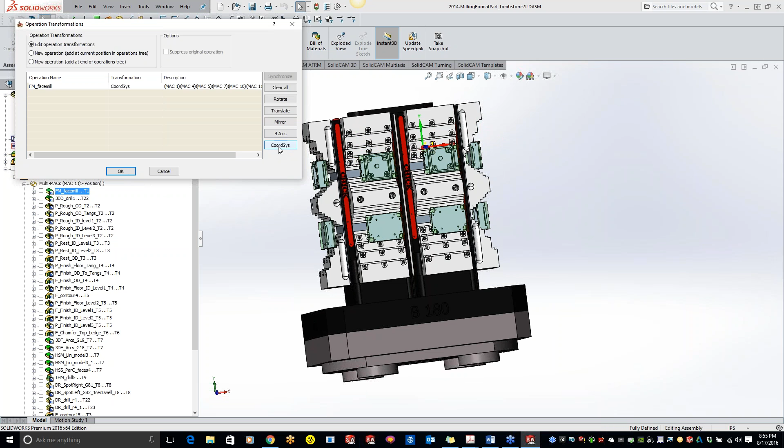You just check which ones you want to do. So I included the original with my Mac 1 position 1, and I included all the ones that I wanted to transform. The way you pick this is the order it's going to go.

So now if I hit OK here, let's just do a simulation. It might take a little bit of time to pull up. Well, looks like not too bad here.

So now let me just slow it down for you guys. We're face milling. It's going to come over to the other part, it's going to rotate, and we're rotating again, just working our way all the way around the part. Now we start back at the beginning and just keep going around and around and around.

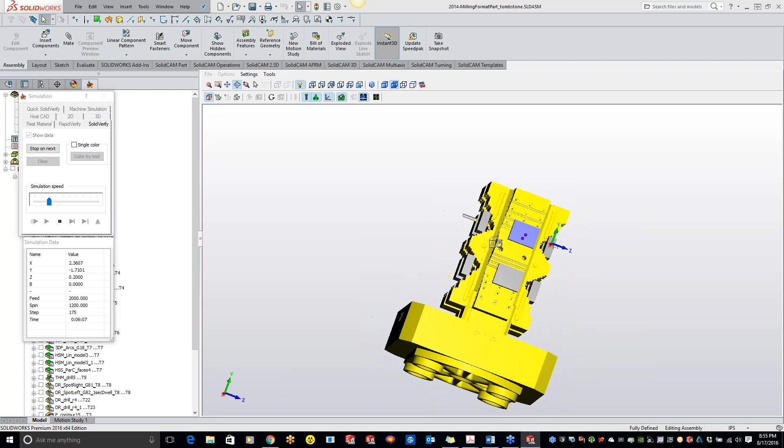Looks like I had a little bit of rubbing going on.

Like I said, this is more useful if you guys have multiple parts on your 4-axis - this is another good way of doing it. Same thing with something like tombstone. And you don't have to set any distances or anything like that because everything is pulled off of the Mac.

Before, when we were doing 4-axis or even transform, we told it we wanted a spacing of, say, 4 inches and we wanted 6 copies. Well, since we created Mac positions for each one of these, we don't even have to worry about the distance or how many copies - we just go off of the Mac position.

Kevin probably had a question - are these all coming under G54, or by increments? These are going to be coming under G54, G54.1, P1, P2, P3, P4, P5.

It's all your extended work offsets, and it's all dependent on your post. So it might come up as G54, 55, 56, 57.

But if this is something you guys do on a regular basis, with 2015 we have to add a registry key in there for you to be able to do this where it goes in the proper order, utilizing the B rotations. Because you'll notice we're not just working on the front side of this part - we're actually coming in from the sides too and getting these parts. It's a quick, easy registry key that I just have to send to you. But I think in 2016 it's already included, so you guys don't have to worry about that.

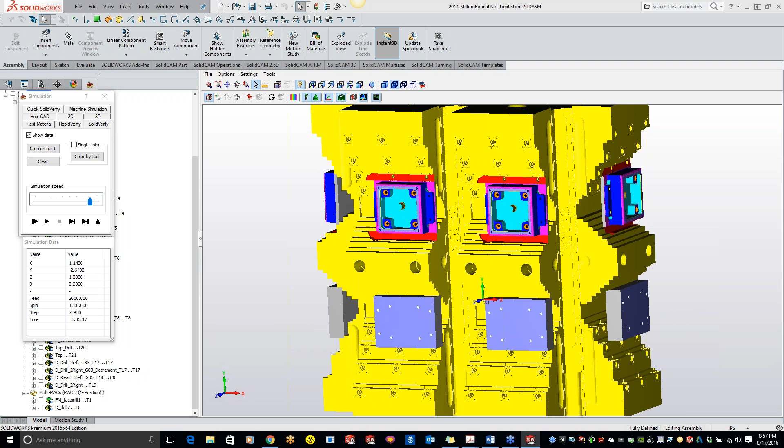So to answer your question, on this particular one it's going to be G54.1, P1, and then so on, P2, P3, P4. So it's going to be all in your extended work offsets, but that can be completely changed around for you guys, for what you want to see on your machine. We just have to switch up your posts.

Did I put anybody to sleep? I know I didn't put Dwayne to sleep yet. Okay, another question from Dwayne.

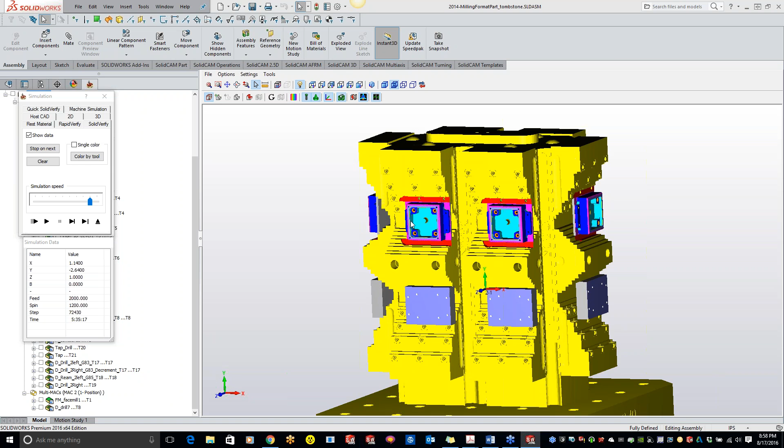That's going to be Machine Sim. That's the only time we can actually have it rotate around like what you're going to see in the machine. For those of you that want to see what it looks like, I did a Haas right here, a Haas ST20Y. With this one it does show that - let's just make this bigger and go to a higher resolution here.

Okay, so here is Machine Sim, and Dwayne, Machine Sim is very cheap, and it's going to save your butt if you're running more than 3 axes. So if you are interested...

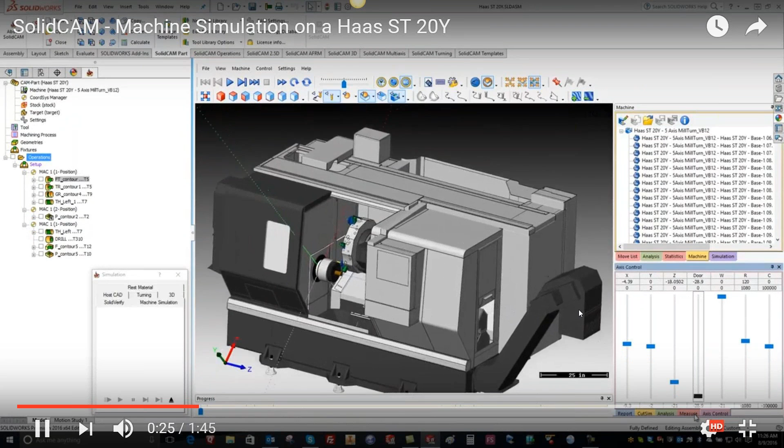Real quick, Kevin - the Machine Sim comes with the 5-axis module, the 5-axis Pro. It's an add-on to the standard, and it's only about $800, but you have to send us the model - you have to send us the 3D machine modeled up, and we'll write the simulation for it.

Yep, but the customer is to supply the model. Yeah, and a lot of times you guys can get those models right from your manufacturers. So we're going to play it through here, and you'll actually see everything moving like it's supposed to.

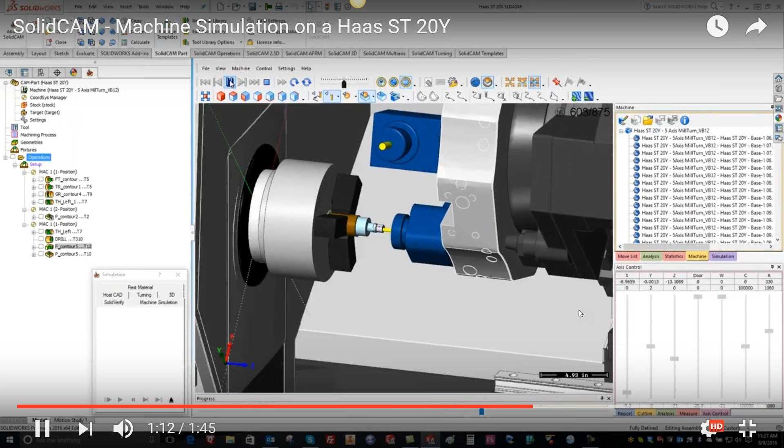And you know, you guys can see how the turret's rotating. If you guys just have a 3-axis machine, we can put machine sim on that too. If you actually think about the cost of crashing a machine versus machine sim, it's pretty cheap.

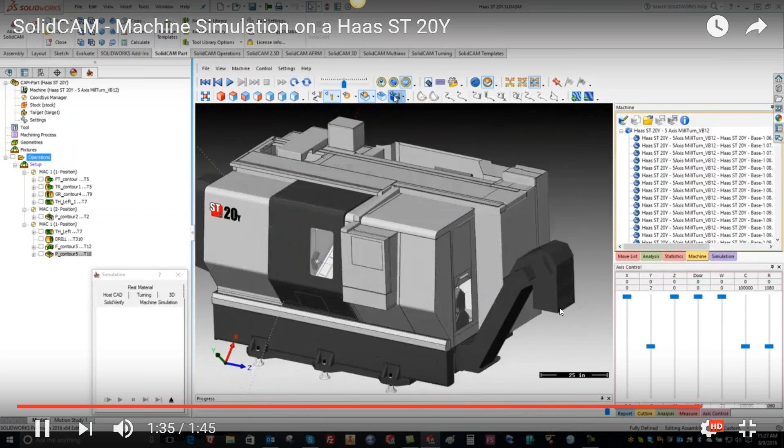We won't say what Dwayne said, but any other questions, guys?